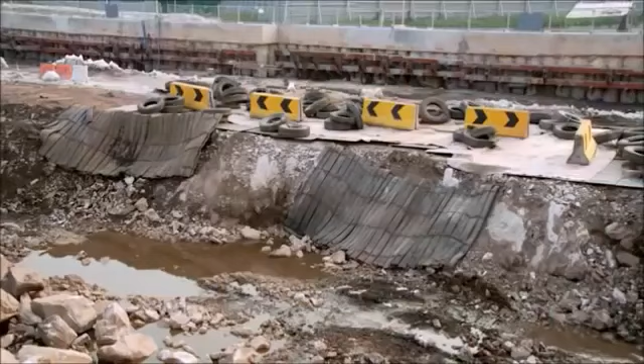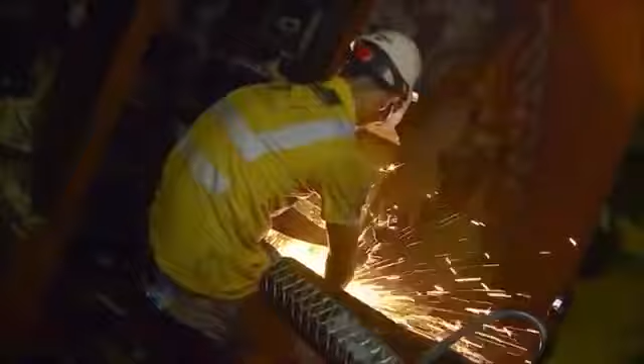Now there's an ambitious solution: a new transit system that will crisscross not only the city, but the entire region of Greater Kuala Lumpur. Huge machines will bore into Kuala Lumpur's treacherous bedrock to carve out almost 20 kilometers of tunnel. Every day of construction, the engineers confront the perils of mechanical failure, fire, and collapse. Get it wrong and billions of dollars of investment could go to waste, and the streets of Kuala Lumpur and its pent-up economy will stay trapped in gridlock.

Kuala Lumpur is one of Asia's most vibrant cities. It's looking to compete with the region's Asian tiger economies. Its magnificent skyline testifies to its soaring ambition. But at street level, it's a different story. The city is blighted by severe congestion that threatens its future growth.

Over 7 million people live and work in the Kuala Lumpur region, the Klang Valley. Every day, they head into town in 4 million cars. As an alternative, a light rail transit system was built. But over time, it has been overwhelmed, and connections are inadequate.

Now there's a solution: a new mass rapid transit system that will reduce the pressure on traffic and unite far-flung parts of the city. For any modern metropolis to be vibrant, to be competitive, to be on par with some of the leading cities in the world, you've got to have a modern public transport system.

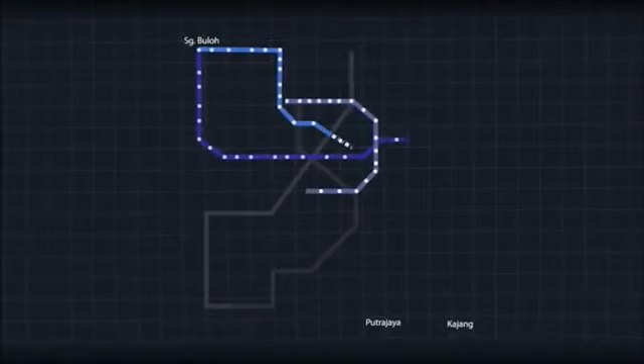The Klang Valley Mass Rapid Transit System, the KVMRT, is Kuala Lumpur's bid for greatness. 3 different routes comprising more than 150 kilometers of brand new lines. It will be seamless travel around the Klang Valley, especially the areas of high concentration population.

And the first stage of the plan is the biggest test of all. This is the Sungai Buloh Kajang line. It will stretch 51 kilometers with 31 new stations. And a fifth of the new line will have to be constructed underground. To do this, 10 giant tunnel boring machines, or TBMs, will be brought to Kuala Lumpur and set to work.

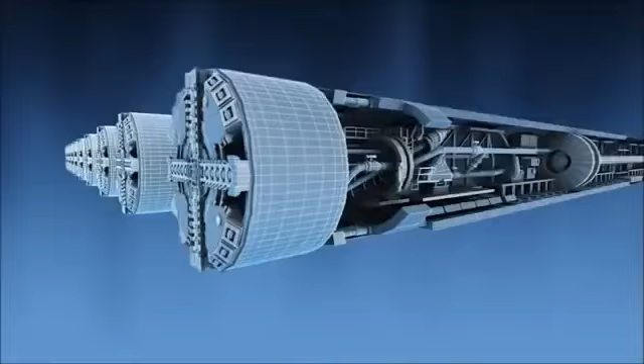These mighty engines do much more than burrow through rock, astonishing though that process is. As the huge drill crunches forward, the back end constructs the tough tunnel frame with high-strength concrete. In charge of this massive operation is engineering veteran Satpal Bogal.

Most cities now, for railway mass transit systems, the tunnels are built using TBMs because of safety issues and because of ground conditions. The underground section of the new MRT will be a perilous undertaking.

For beneath Kuala Lumpur is a formidable engineering challenge. Below the city are 2 very different kinds of rock, and the TBMs will have to deal with both. The western area is known as Kenny Hill, and the eastern areas as the Kuala Lumpur limestone. Imagine the difference between a Dutch Edam and a Swiss cheese riddled with holes.

Dr. Ooi Lean Hock is the project geologist and expert on Kuala Lumpur's underground world. I got this Dutch Edam cheese here. As you can see, this whole piece of cheese is fairly homogeneous, very tight. And Kenny Hill, when it's weathered, it looks something like this. This is like the KL limestone. All right, this is Swiss cheese. As you can see, there are a lot of cavities and voids inside the cheese. These voids can be transmitted all the way to the other side of the cheese. Things can move in from one hole to another hole, and it may come in vertically and go out laterally.

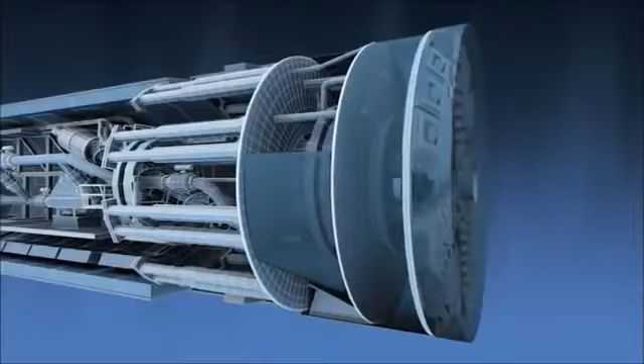This ingenious system was used by the engineers who built the Smart Tunnel in Kuala Lumpur, the world's first combined storm and traffic tunnel. But builders learned some hard lessons about slurry.

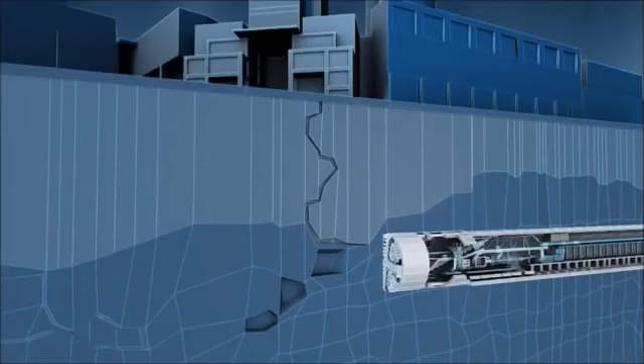Ng Hawei was a rookie engineer on this project. We have the best machines in the world in the Smart project, but we still do have some problems. We just couldn't control the slurry and it easily escapes to the surface, creating sinkholes. What Ng and the engineering team found, to their cost, was that the slurry they injected into the limestone cavities could escape into surrounding rocks and cause havoc, bursting from the ground like a geyser or creating sinkholes at the surface that might suck in people, cars, or buildings.

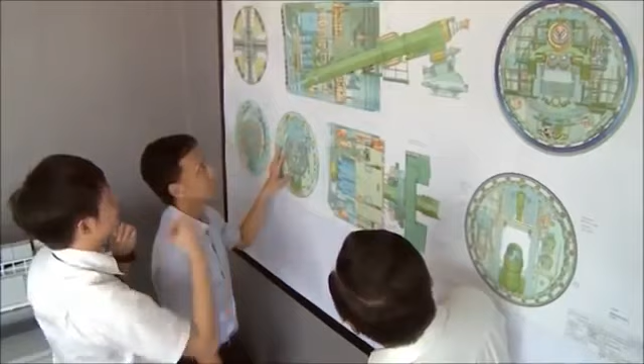Today, Ng heads the tunnel team building Kuala Lumpur's MRT system. And this time, he had to find a solution to the uncontrollable slurry problem. Working with German company Herrenknecht, Ng and the team of engineers have come up with a revolutionary kind of machine. We throw in all the ideas, we have brainstorming sessions, we consult a lot of experts, we have to do a lot of research because no machine has been designed like this before.

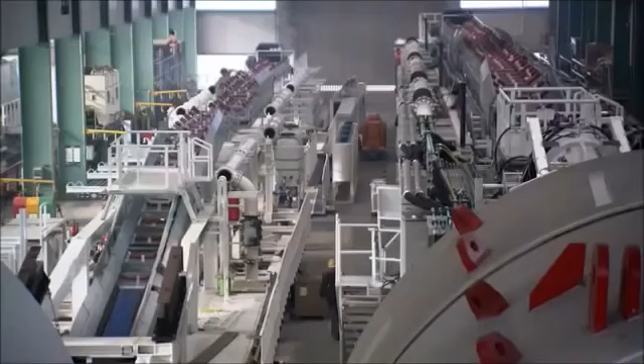From these brainstorming sessions was born this mighty machine. Called the Variable Density Machine, it's the state-of-the-art tunneler. For the first time, a TBM can control the consistency of the slurry and take on whatever Kuala Lumpur's underground throws at it. Even the construction of this revolutionary machine is on an epic scale.

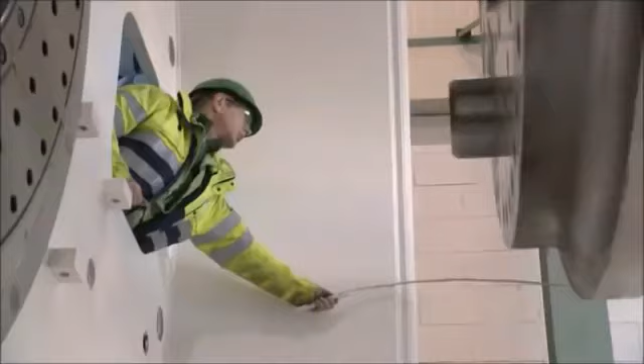Components are brought from all over Europe to be assembled inside the massive factory in Schwanau in Germany and other Herrenknecht plants in China. One machine like this is fitted together with about 40,000 pieces, one by one.

The design starts screw by screw, piece by piece, and this is brought together with all our 400 engineers. They do all these works to come to this level, what you can see today. It takes 9 months to manufacture the revolutionary TBM.

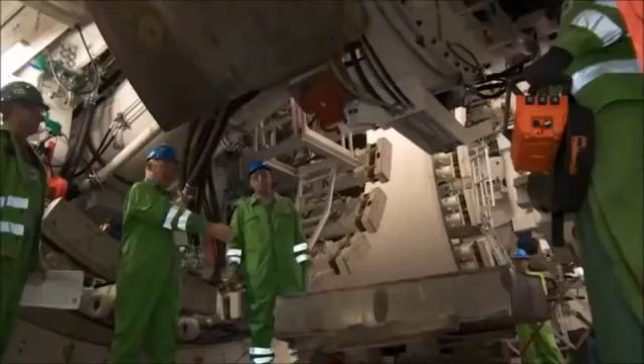Today, it's ready to be put through its paces. We have only seen it on the drawing board so far, so this is the first time that it is all put together. Everything is running, so we can check every equipment, including the cutter heads, the hydraulics, the safety features. This is the last chance for us to make final modifications before we send it to the site and put it in the ground.

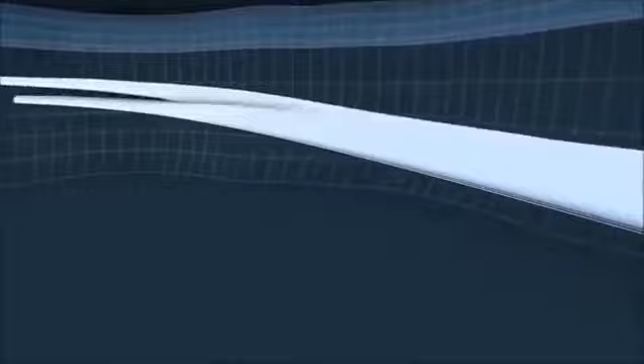As the engineers work on the TBMs in Germany, work gets underway in Kuala Lumpur. The engineering company in charge of tunneling, MMC Gamuda KVMRT, must complete the job in 24 months and with minimum disruption to the city above. The operation is conceived on a military scale and with military precision.

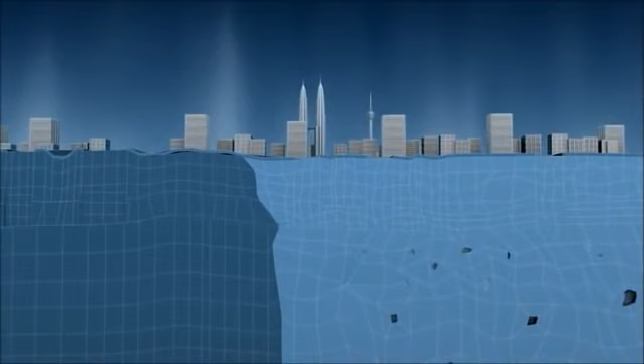The TBMs will be launched from 4 different staging zones along the planned route of the underground section of the MRT. At the western end of the tunnel, the elevated section of the MRT begins its descent underground from the surface. But at the 3 other zones, shafts must be excavated so that the different TBMs can be put to work beneath the city. Eventually, the different sections of the 9.5-kilometer tunnel must all link together.

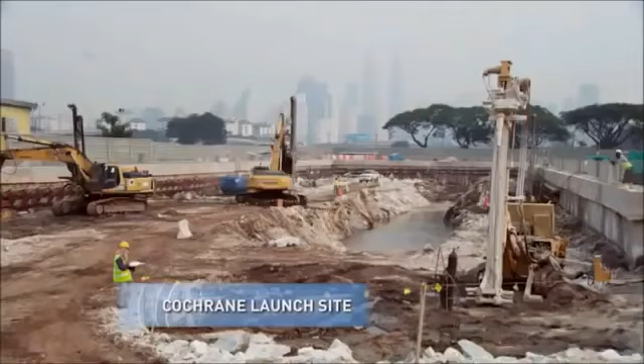Since July 2011, work on Kuala Lumpur's new MRT starts here at the Cochrane site. It must be dug out to a depth of 30 meters before 4 TBMs can be deployed. The huge staging zones will be blasted out of the ground.

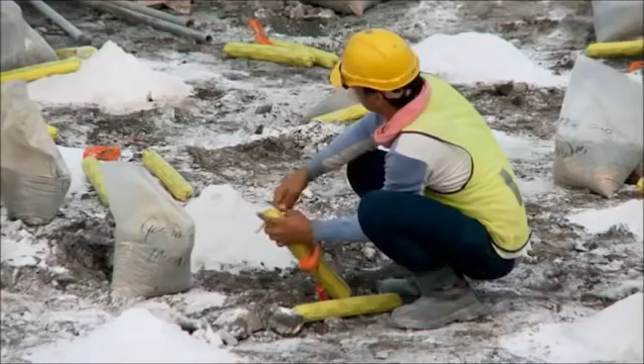We have short time to meet our requirements, so we are working with frequent blasts, more than 2 or 3 blasts a day. The blasting must be carried out with rigorous precision, especially in a city as dense as Kuala Lumpur. So when you talk about blasting itself, it's dangerous.

You can see we've been surrounded by high-rise buildings. Now at the moment, you're using about 150 to 200 kg, so that can bring a 10-story building down. The solution is to sequence each blast, creating a pressure wave that, in theory, won't damage surrounding buildings.

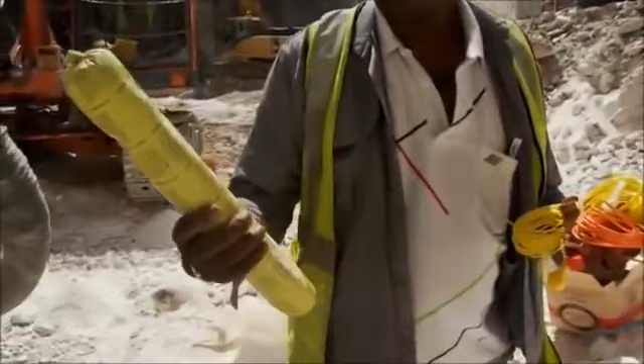These are the basic things we use. My hand now is explosive, which will be charged to the detonators over here, and it will be connected one at a time, and finally we have delays. This will segregate the blasting rather than at one go.

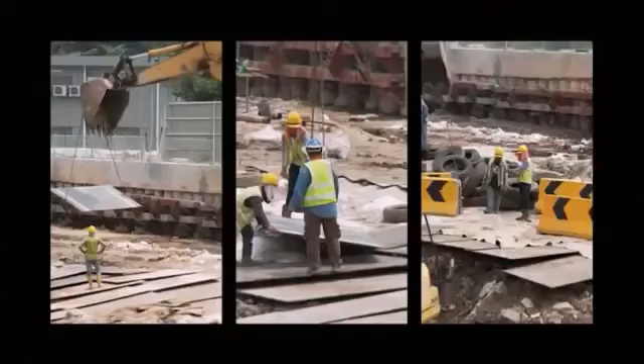Engineers dig rows of holes between 3 to 6 meters deep. Then the explosive charge is inserted inside with a detonator. These are connected to a central command point. But nothing is left to chance. Giant barriers of steel plates, truck tires, and concrete prevent debris flying from the site. The charges are set.

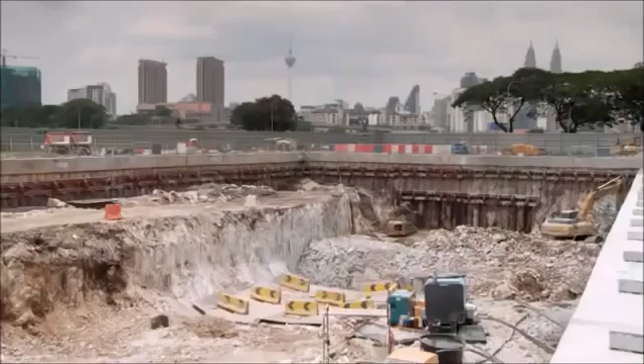The engineers have got the right formula, and the surrounding buildings are safe. The blasting continues at the Cochrane site for seven explosive months. Enough rock and soil to fill 50 Olympic-sized swimming pools is blown out of the ground.

Finally, the site is ready to receive the first TBM, code name 774. At the beginning of 2013, the first new model arrives in Kuala Lumpur. The giant machine is transported in parts to the Cochrane site on huge lorries.

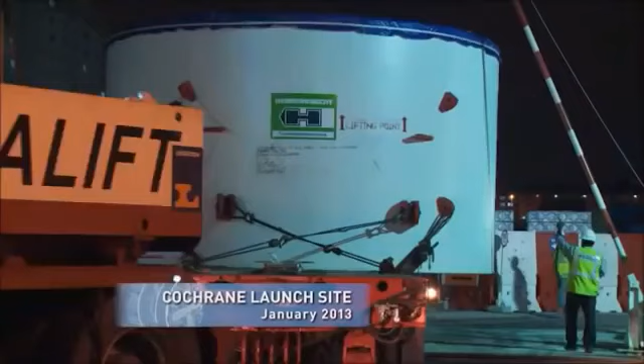But that's the simple part. Now the 160-ton monster must be lowered into the excavated shaft so that they can start chewing into bedrock. To lift it down 30 meters down the shaft, we have to be very careful. Anything can go wrong, and then we are stuck. It will push back the whole project completion by a lot.

At the site, everyone is holding their breath as the TBM begins its descent underground.

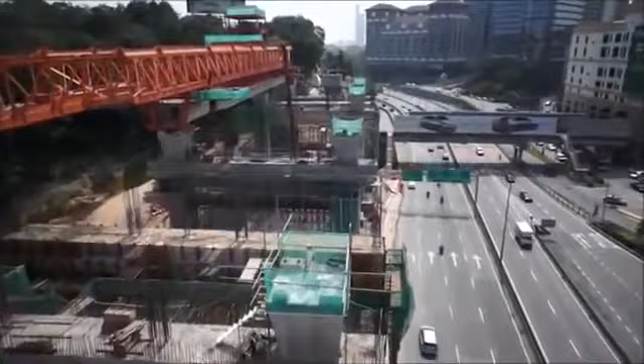Malaysia's capital, Kuala Lumpur, is being transformed into a huge building site. A new MRT system is under construction. Close to 10 kilometers will be built beneath the city, and a revolutionary new tunnel boring machine, or TBM, is brought from Germany. The first to be sent into action weighs 160 tons and has to be delicately lowered 30 meters to the tunnel entrance.

The man in charge of the tunnel operation is Ng Hao Wei. He won his spurs building Kuala Lumpur's famous smart tunnel.

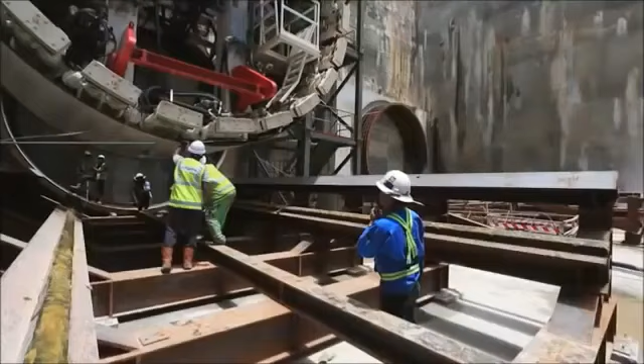We are dealing with very delicate components. We cannot afford to damage it. If the extent of damage is huge, then the impact to the project will be tremendous.

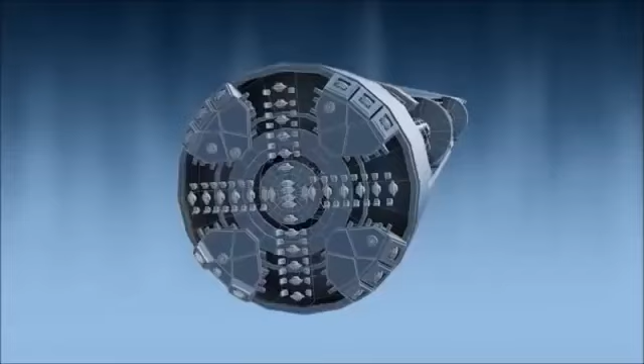This is literally the cutting edge, the business end of the huge machine. The circular cutter head weighs 70 tons with 37 tungsten carbide cutting discs, which are stiffer than steel and denser than titanium. The entire TBM is 135 meters long, almost double the length of a 747 jet airliner.

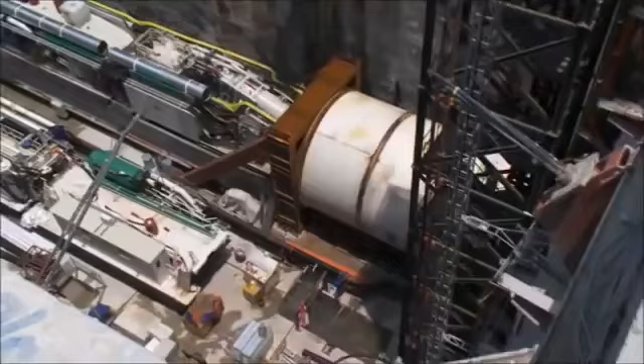Each TBM has 10 interconnected gantries to support the operation. Only three-quarters of the shaft has so far been excavated, so the monster machine has to be assembled in sections. We assemble up to the sixth gantry, which will give us the key components of hydraulics and electrics, so we can start to launch the machine, at the same time give sufficient space for the shaft excavation to go on. It takes just under three months for the TBM to be assembled.

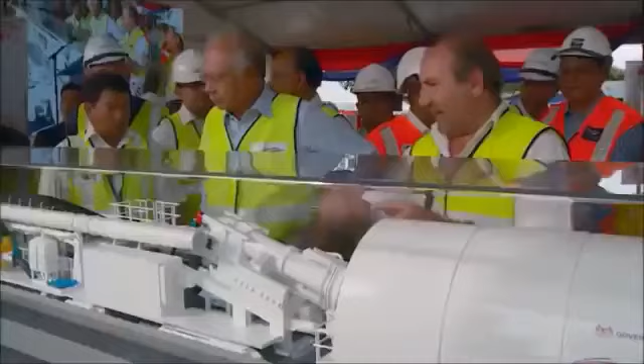The Prime Minister of Malaysia launches the very first variable density TBM. It's actually a technological marvel. And it goes to show that, in partnership with a German company, Malaysians can offer a lot of our technical guidance and advice. This is something that we can be really proud of.

One day later, Ng Hao Wei and his mentor Gustav Klados arrived to check on the machine's progress. Gus, a veteran Hungarian tunneler, has worked on some of the biggest tunneling projects in the world, including the Channel Tunnel linking Britain and France, and the Smart Tunnel here in Kuala Lumpur. This tunnel warrior is the team's project manager and is thrilled to be working back in the city on the new machine.

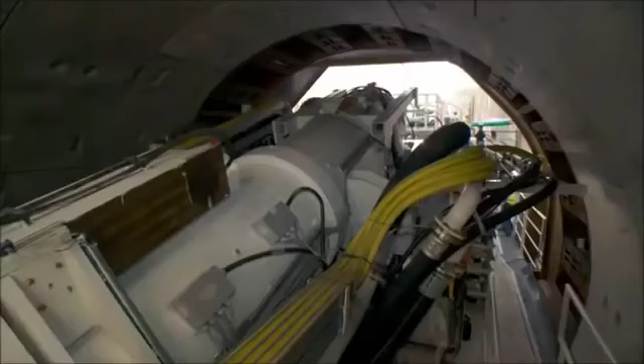It's uncharted territory. We are trying out something totally new. A lot of people at the beginning said no, it won't work. But now it is excavating. You can hear the stones moving around in the pipe, so it's a fantastic noise. It's my favorite, much better than in the office.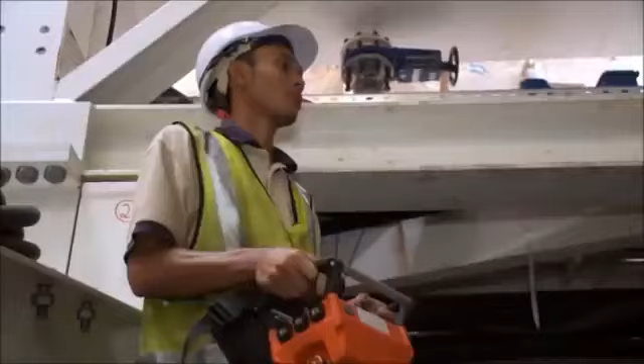It's not just the machines that will need breaking in. The giant TBMs must be served by an army of workers, day and night, week after week, month after month.

I'm new here, but I try to make my best every day. Everybody starts as new. Trust me, me too, I did start as a new guy. My first job was to go and count the number of nails and bolts and nuts in the stores. I went there and literally counted them for a week. When I finished, I went to the storekeeper and he told me that we usually use a scale.

The MRT tunneling project will need thousands of workers over the two-year period of construction, and MMC Gamuda set up an academy to train the hundreds of workers needed to finish the tunnel on time.

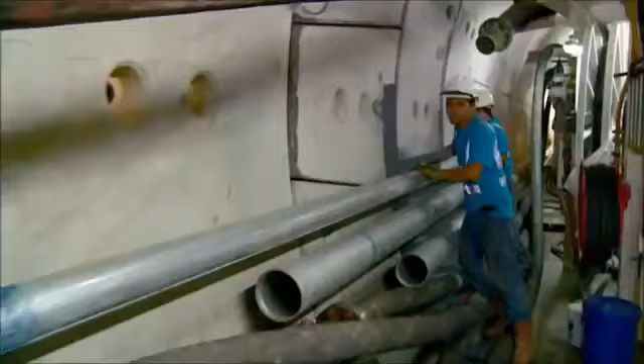Veteran or newcomer, the team faces a daily avalanche of problems, and right now the problem is pretty basic. The TBM is just not picking up speed. 8 millimeters a minute, not very fast, but it's all right.

At this pace of tunneling, the project will take 4 years longer than expected and run millions of dollars over budget.

But veteran engineer Gus Klados hopes that the giant machine will soon pick up speed. In the next few months, it is just a matter of breaking in the machine, like a horse which has never been ridden before. And I am convinced that we will make it work.

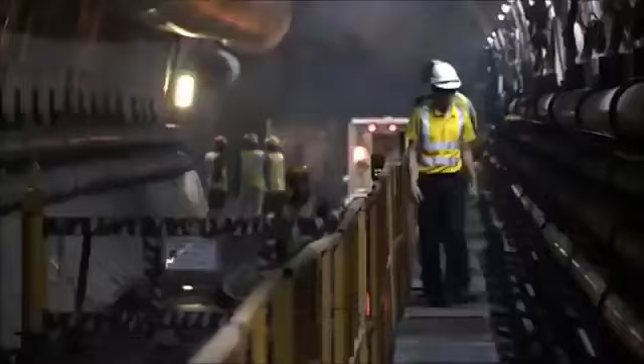The team is under pressure to complete the tunneling works on time. In the tunnels, the TBMs never stop mining. It's a 24-hour operation. And three weeks since mining began, the giant machine has at last picked up speed.

The TBM is like a huge underground factory, drilling, building, and spewing out waste. The heart of the entire operation is in this tiny space.

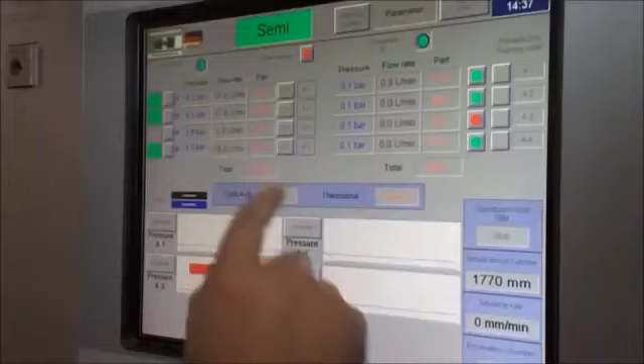So what's happening? Pressure sensor number 4 has a broken wire. Control cabin means the heart, the control center of the TBM where everything is controlled. We need to push one.

If you're building a skyscraper, visibility is not normally a problem. But underground, it's a different story. You can't see through rock. So to give the TBM underground eyes, the machine is equipped with arrays of sophisticated sensors. It's like when you are working in a submarine. You have to depend on the sensors, you have to depend on communications, you have to depend on eyes other than yourself. You can't see anything.

Inside the control cabin, engineers can work out with absolute precision the real-time position of the TBM, calculate changes of direction, and when to start lining the tunnel wall.

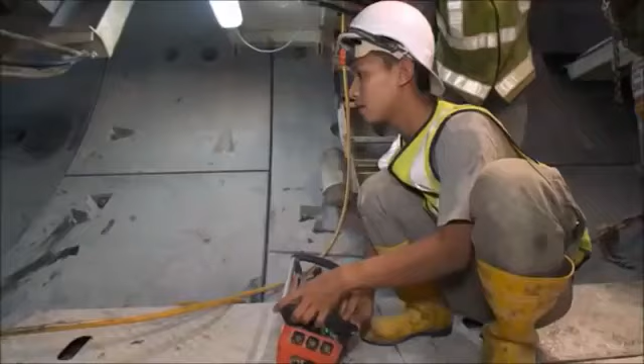After mining about 1.4 meters, we build the segments piece by piece and then build them up like a jigsaw puzzle. These tunnel rings are made from 7 segments plus 1 keystone that holds everything together.

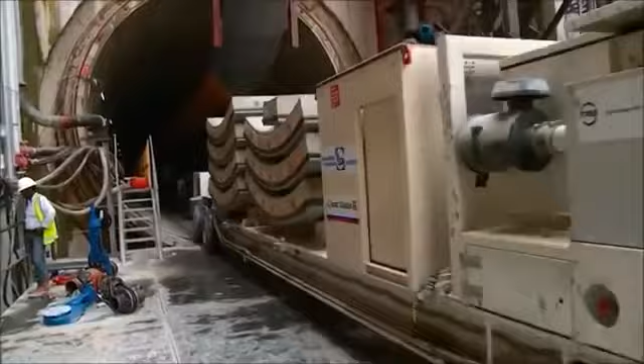The concrete wall segments can withstand extreme pressure 30 meters underground. All day long, concrete segments arrive at the TBM. Each segment weighs 2.2 metric tons.

Giant hydraulic arms swing the segments into place using the TBM's vacuum erector, which uses the power of suction to raise and position each segment.

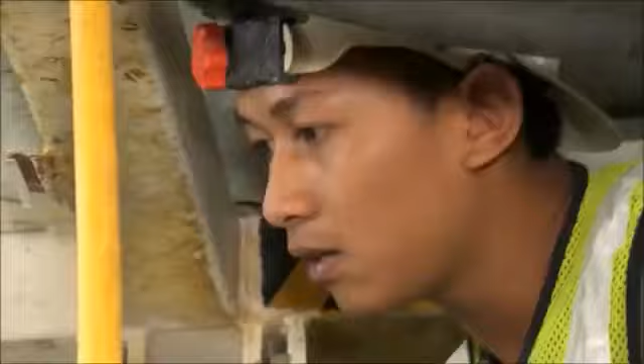Precision is essential. If any one of these segments is wrongly positioned, the consequences would be catastrophic. So it's very important to drum into the ring building team that they have to build it to the required tolerance of a few millimeters precision.

If we are out of tolerance, the water will find its way to seep through and we'll have a great problem to seal it up. Over time, as graduates of the Tunnel Training Academy get more experience, the process builds up momentum.

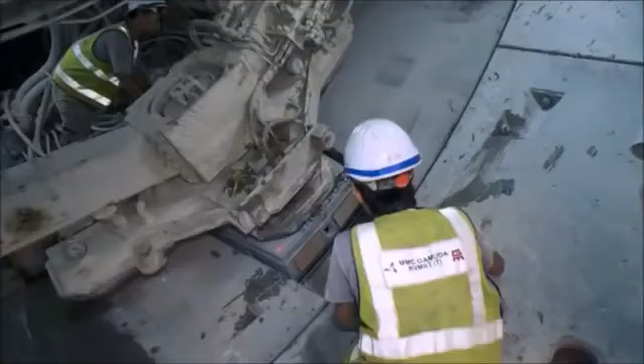In the first week, the teams managed to place just 3 rings a day. Three months in, and the rate is 5 times higher. The campaign to excavate Kuala Lumpur's new MRT tunnels is about to enter a more intense phase. By November 2013, 4 TBMs have been successfully launched from the Cochrane site.

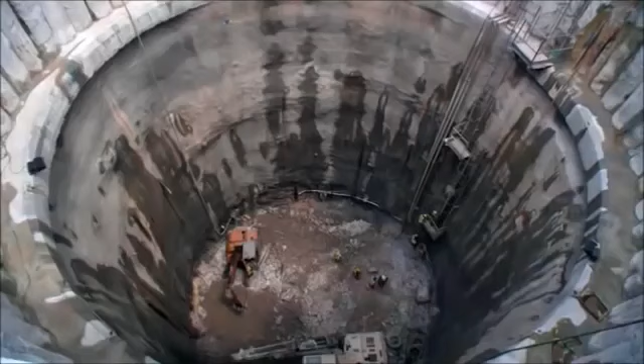But at another launch site near Inai Road, the engineers have run into difficulties. Here, 2 circular shafts are being excavated to 30 and 45 meters in depth. But as the shafts are blasted out of the ground, disaster strikes.

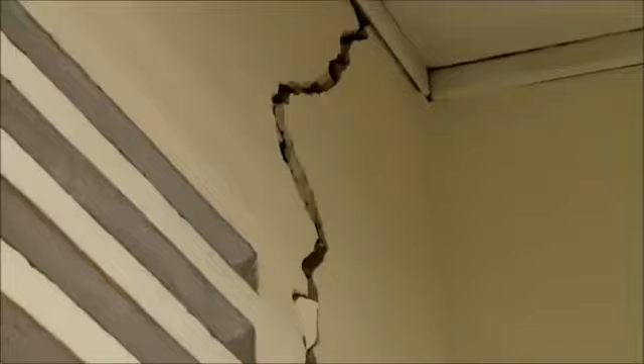Terrified, Mr. Jamal calls the company in charge of the MRT project. When inspectors see the condition of his home, they make an immediate decision to move the family out. Engineers now need to explain what has gone wrong and whether other homes are at risk.

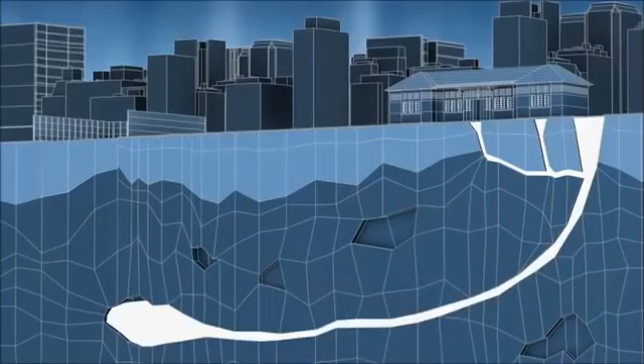In limestone, what happened is that the solution features can be connected laterally and vertically. What happened is we drill a shaft, so this hits a connection. When there's a hole, it's like a pipe culvert.

If you have a culvert connecting from the shaft to underneath Mr. Jamal's house, that forms a very easy flow passage of water, bringing the soil from underneath Jamal's house into the shaft. And that results in sinkholes.

And it's not only Mr. Jamal's house that's in danger. Water is pouring in from the walls in the deeper of the 2 Inai shafts.

It's unstoppable, and the situation is a tough call for project director Satpal Bogal. We couldn't stem it, and the decision was taken to backfill it for safety. That decision then followed on to other changes to the program.

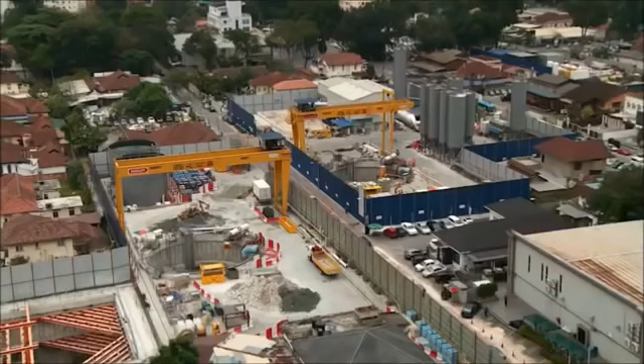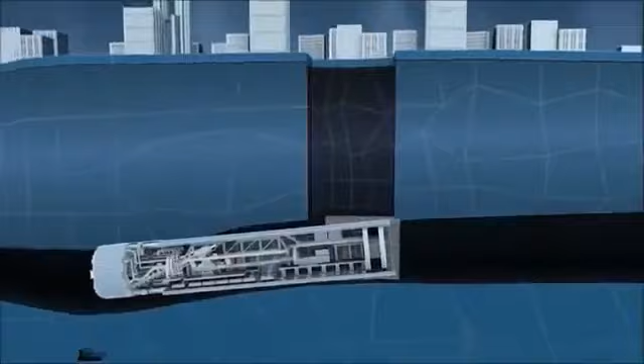Abandoning one of the two Inai shafts is a huge setback. Now only one TBM can be launched from here, meaning a new strategy has to be devised. The first TBM brought to Malaysia, 774, which has been mining from the Cochrane site, must now make up the difference and tunnel more than twice the distance. It will put the complex machine under severe strain.

It's not only flooding that makes the Inai launch site such a headache for the engineers, it's also a very tight fit compared to the other launch sites.

Tunnel engineer Aslan Marzuki is in charge of getting the huge TBM to the bottom of the shaft. It's a smaller shaft, it's not a square, it's a circle. That saves space, but that means our launching is going to be staggered.

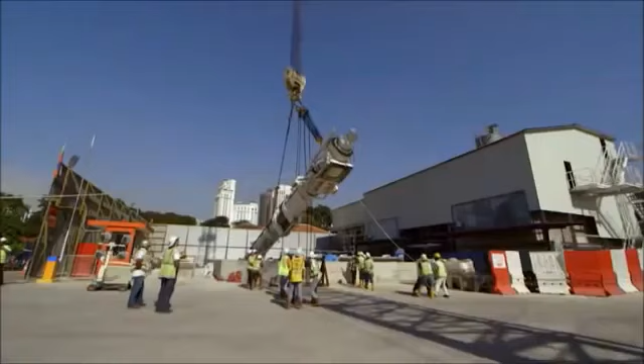The team will blast out tunnels on both sides of the shaft. Then the front section of the TBM is inserted. Next, 3 out of the 10 gantries will be lowered one by one, followed by the giant screw. The problem is that the 18-meter screw segment is longer than the width of the shaft.

Behind me, this is our biggest component that's going to be lowered down. It's the most difficult one because this length is actually bigger than the shaft itself.

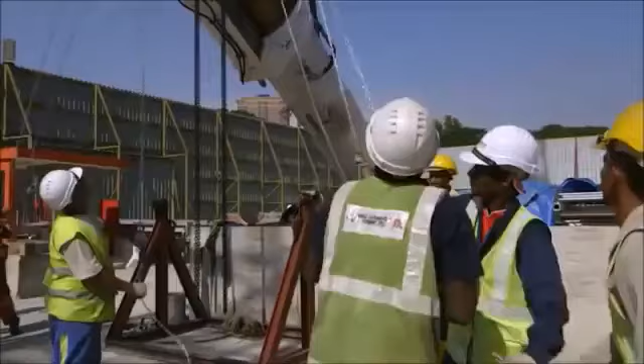The solution is simple, but risky. The screw segment of the TBM will have to be lowered into the shaft at an angle. We have to tilt the screw conveyor at a 36 degree angle, using a chain block and a hand winch to pull the machine upwards. It sounds simple, but that giant screw weighs a whopping 15 tons, and any deviation from that critical 36 degrees would be catastrophic.

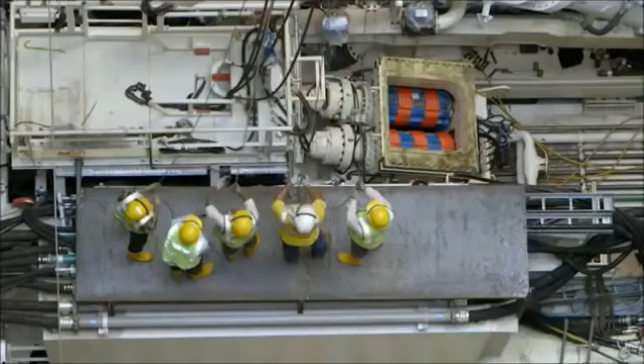At the bottom of the shaft, the engineers face another challenge. The angle of descent has to be lowered. It's another fiddly maneuver with a lot of complicated machinery at stake. When you lower it down, the final angle is 15 degrees. Down there, you still have to do the same exercise again, but it has to be a slow process. After 2 hours, the screw conveyor is finally in place.

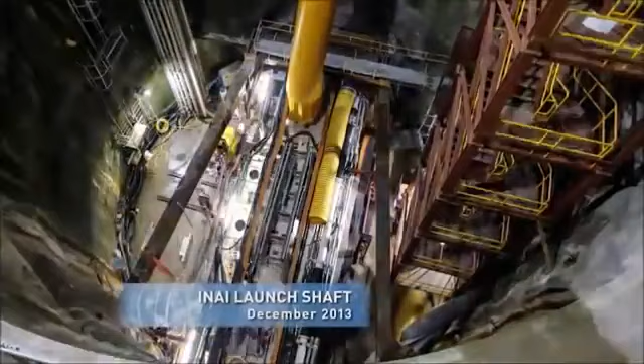It takes 3 months of hard slog to put the TBM together, but at last it can begin burrowing into the limestone. This underworld is packed with hidden dangers. Like Swiss cheese, the rock is riddled with cavities that could wreck the multi-million-dollar boring machine.

When you're tunneling this way and you have a cave directly underneath your cutter, and it's big enough that you cannot develop a face support, the thing just dips inside. In that situation, we are snookered. It will take us months to recover or to bring that TBM cutter face into operation again.

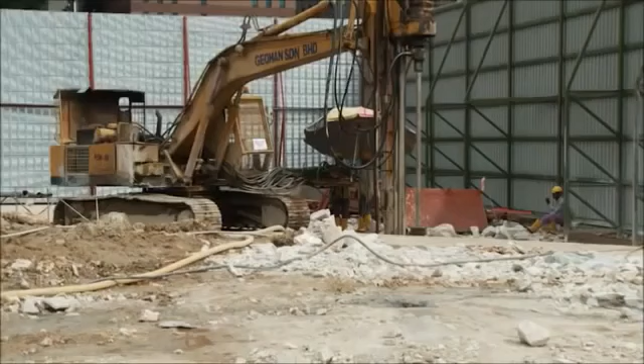So as the huge drill edges forward at 14 meters a day, an army of engineers is busy scouting the perils that lie ahead. They drill hundreds of boreholes into the layers of rock. Once a cavity is detected, concrete is poured into the hole to shore it up. It's a process called grouting.

If we do encounter such a thing, then we'll do a lot of compaction grouting to fill up this void, like you go to a dentist to fill up your cavity, to ensure that when we are tunneling through, the TBM can go through safely.

But some cavities can be less than a meter wide. These are much harder to fill, but still pose a threat. There's no way we can pick it up. We are unable to treat all these features along our tunnel alignment. So what we then need is a machine that can cater for all these little challenges.

Enter the new breed of tunnel boring machines. Behind the drill, a sealed high-pressure chamber is pumped full of liquid called bentonite slurry. Unlike previous models, the new TBMs can control the density of this thick gray liquid, changing the consistency from a thin, watery liquid to a thicker, honey-like substance. The thicker slurry is used to fill these hidden cavities, and its density prevents it escaping through the porous rock to the surface.

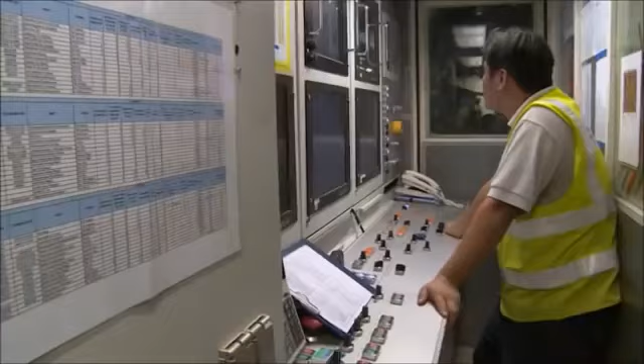The machine is able to operate at different modes at the flip of a button or some switches. So when there are situations where we have major loss of slurry, we can then switch to a thicker density - a little paste that chokes it up - and then we can mine through very easily. The revolutionary new tunneling system soon proves to be a success.

But there is a problem that all tunnel engineers fear at the back of their minds: fire. Every tunneler's nightmare. For engineers excavating Kuala Lumpur's new MRT system, the most terrifying scenario is a fire in the tunnel. A blaze can suck oxygen from the air in seconds. Workers can suffocate with terrifying speed, and the tunnel itself works like an oven, insulating the environment and ramping up temperatures to deadly levels.

Tunnel workers must be ready to react at any moment, and training exercises are made as real as possible. Christopher Fenton, head of safety, health, and environment for the underground, is training the company's emergency rescue team. Tunnels are very dangerous during construction. Fire is the last thing we want, and we need to be able to respond to it very quickly if it did happen.

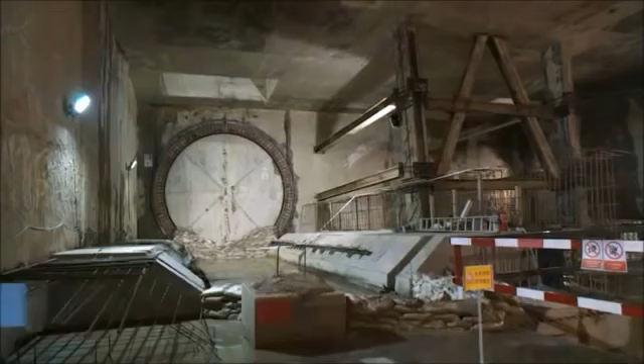Christmas Eve 2013, and the MRT engineers have cause to celebrate. One section of the tunnel, where the MRT line dives underground at Semantan to the Museum Negara station, has been completed. It's the project's first breakthrough, and at any moment the TBM drill head will emerge from this tunnel.

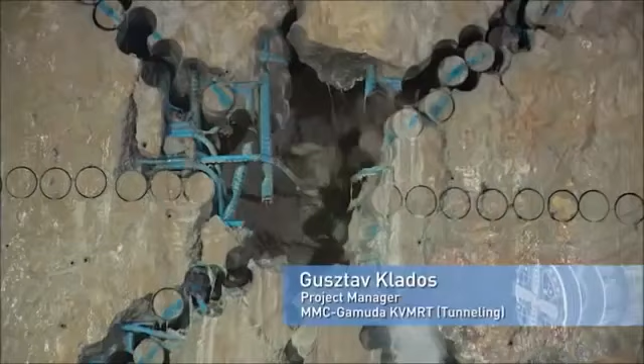It's an anxious wait for tunnel manager Chin Raymond. I told him if it doesn't come in the middle, it has to jump off a cliff somewhere. After drilling for 6 months, the TBM punches through right on target.

Okay, thank you. Congratulations. Well done, man. Okay. Good. Yes, great. Finally, I pushed my machine, it came in. I've been working for more than 24 hours. I can have a good rest to enjoy my Christmas.

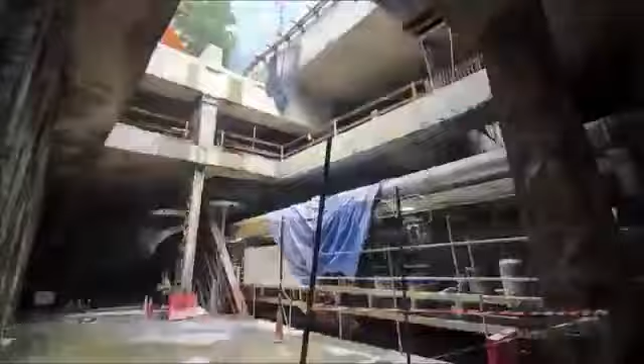But the machines don't get a holiday. As soon as the TBM completes its breakthrough, it is hauled into position to begin work on the tunnel that will link Museum Negara to the next station. The TBM is now burrowing beneath the historical heart of Kuala Lumpur.

The Museum Negara is a repository of the nation's history and culture. Its facade is lined with precious mosaics. Further along the path of the excavation is the old railway station, an icon of the past that stood the test of time. But can it withstand the mighty TBM as they thread their way nearby? We were stuck with having to cross under some sensitive structures, and the ground settlement would affect the existing structures. If there's too much ground settlement, the buildings could collapse.

For the old building, we had to pay much more extra care because we don't know how good the structure is, or how good this building's foundation is. So we had to take extra precaution on that.

A team of surveyors now equip these venerable buildings with highly sensitive sensors that monitor every vibration. As the TBM approaches, Tae Chi Yong and his team nervously carry out hourly tests to monitor the old buildings. The TBM is directly below this building. We get to monitor the effects and impact of our TBM drive on the structures above, on the surface above.

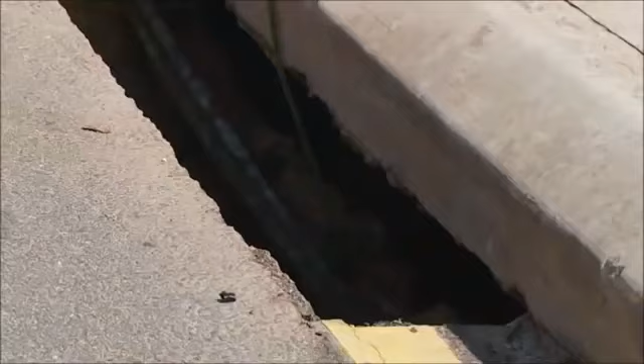Right above the stalled TBM, ominous signs ripple across the road, less than a kilometer from the presidential residence. While the people of Kuala Lumpur get used to living and working in a massive work site, where giant boring machines gnaw away at the city's bedrock to build a new MRT, the President of the United States will be descending on Malaysia in 3 days' time.

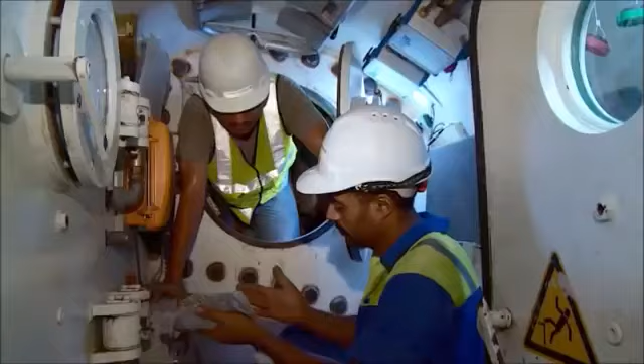But all is not well with TBM 774. Located less than 400 meters from Obama's planned accommodation, the TBM gets a bad case of indigestion and is unable to process the waste from the cutter head. It has come to a halt.

Directly above the TBM, a team is tasked with monitoring road surfaces to look for any signs of trouble. Called the Bull Gang, it is led by Michael Poon. We have a team of people patrolling 24 hours. We have to check on the surface.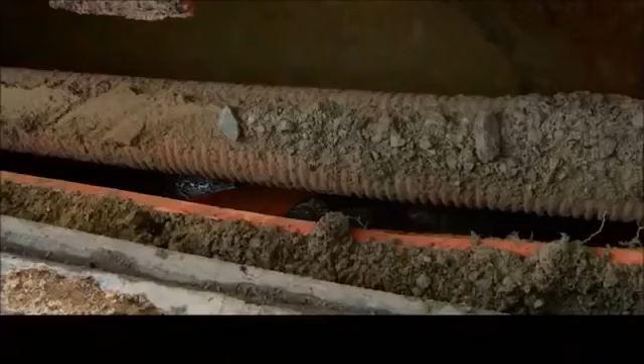This morning I walked by, I saw some settlement. It's just a small depression. I can see the hole, it's quite deep. At the surface, the cracks don't seem to pose much of a threat.

But like icebergs, most of the danger is hidden. Down there is a void big enough to fit an electric car. We have an unscheduled stop. They have to lower all the slurry. That means the face support is affected, and that causes a depression or a sinkhole in front of the cutter face.

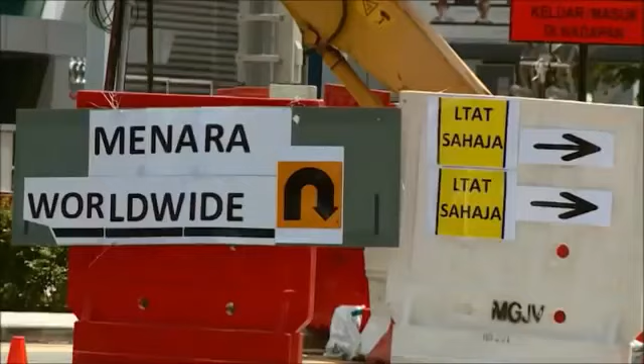An emergency response team reacts immediately. The road is closed to traffic. Then we decide to order mortar to fill up the hole. The hole is quickly filled with 5 cement trucks of concrete, and frantic repair works continue inside TBM 774.

Across town, there is reason to celebrate. The 5th breakthrough of the project will take place today. It's a landmark moment - it means that 50% of the tunnel has been completed.

Well, every breakthrough is like a landing on a plane, right? Once you're there, you feel great because you brought home the TBM. The breakthrough, I thought it was very exciting. Now we finished everything, it's very, very good. I'm very content with the progress as well.

The quality of the tunnel linings in the precast concrete inside is one of the best. We work as a team. We work night and day, blood and sweat, hard time, good time. This is the prize for all the crew. This is like a present.

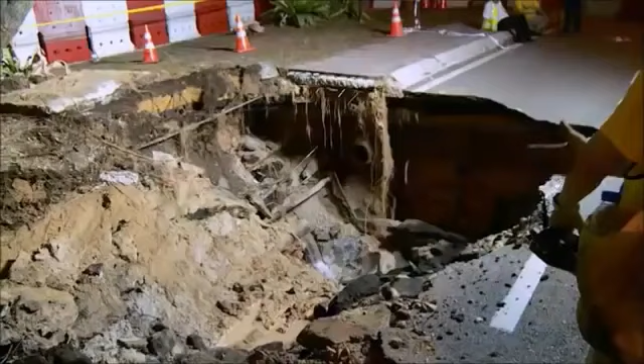But the celebrations are short-lived. As TBM 774 finally starts mining again, President Obama arrives in Kuala Lumpur. But to the horror of the team, another collapse occurs just meters away from the earlier sinkhole as the president is at the official state dinner.

This new sinkhole is an even bigger problem than the previous one. Ground movement has broken water pipes, and the hole is filled with live power cables.

President Obama is living nearby. We definitely would not want to cut off water and power to where Mr. Obama is living, obviously. So we're trying to get this done in the quickest time possible.

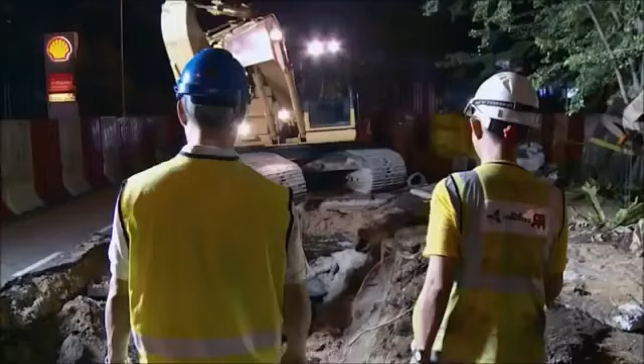Racing against time, the Bull Gang takes 5 hours to repair water pipes and fill the hole. As they work into the night, President Obama and his entourage are blissfully unaware of the battle being fought less than 400 meters from their hotel.

TBM 774 is now approaching the zone where the underground geology changes from the karstic limestone to the Kenny Hill Formation - from Swiss cheese to Edam.

We are going through a very distinct change in ground conditions. In normal cases, you will need to use 2 different types of machines, and you will need to have another launch shaft to do this. It will take months. But the new variable density TBMs can be retooled underground.

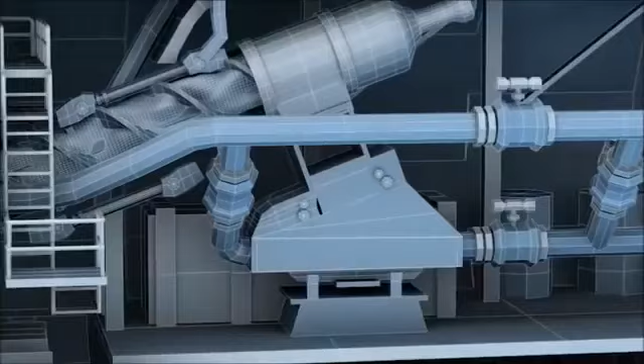It's a matter of changing the way waste is extracted. Instead of extracting through pipes, it needs to be removed with a system of conveyor belts right to the end of the gantries onto these so-called muck cars. The conversion takes 1 week to complete, but it's a much smoother process than the older system.

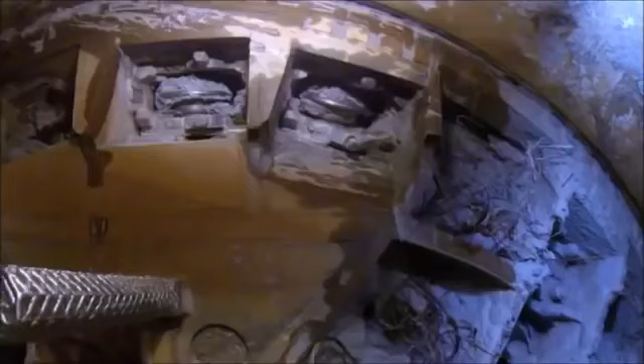But a much bigger hurdle awaits the TBM 774, an underground tangle of steel wires that could bring the TBM to a standstill.

30 meters beneath Kuala Lumpur's nightlife hotspot, Bukit Bintang, engineers excavating the underground section of the city's new MRT encounter an unexpected obstacle. Contractors of a shopping mall adjoining the street have left steel wires known as ground anchors in place, and these are bang in the path of the TBM.

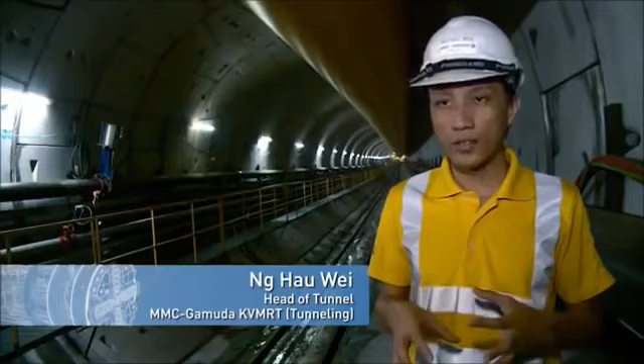Put into the ground as temporary supports for the basements, they could hold up work for months. It's very difficult to find them from the surface, and you cannot remove them from the basement anymore because the permanent walls are built, right?

They are all covered. Since the steel wires cannot be extracted, a decision is made to push on through with the TBM. But there is a continuous risk that the drill head may become entangled and damaged in the wires.

It is the task of engineer Ng Hau Wei to monitor the tunnel ahead. So in the morning, actually, we found some ground anchors dropped underneath the conveyor belt, and we decided to stop the TBM, look for the ground anchors, cut it and remove it.

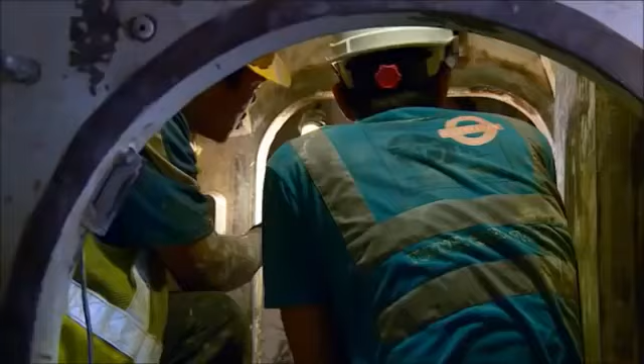A team now has to enter the space around the cutter head at the front of the TBM. There's little space to maneuver, and temperatures are close to 40 degrees Celsius. To overcome this tangle, first, the team washes away earth from the cutter, exposing the snarl of steel wires caught in the cutter head. These must be cut away with an oxyacetylene torch. It's a laborious process.

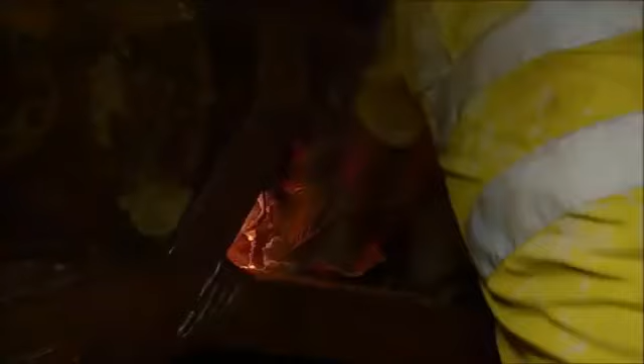Every time they hit the ground anchors, the TBM halts as the wires are trimmed away. It takes 2 weeks to mine through this web, but it could have been worse. If we had hit all the ground anchors that we expected, it would have delayed the project by about 3 to 4 months. And we were able to go down and cut these ropes so that they weren't stopping the cutter head from turning, and we carried on.

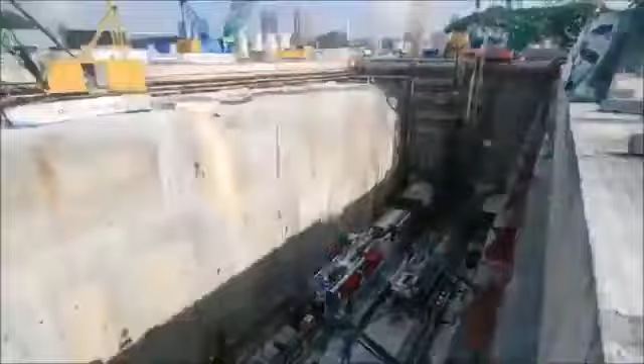It's the final breakthrough. After 23 months of excavation, from tomorrow, the TBM will fall silent. The honor goes to TBM 774. This was the first TBM to be launched into the limestone labyrinth under Kuala Lumpur. It has burrowed its way through almost 5 torturous kilometers of rock and soil. Now it must make the final breakthrough.

It's a thrilling day for the engineers inside the giant machine. We are about to break through. We have about 400 mm left on the cut. Hopefully we'll get a successful breakthrough. What's happening now is we're cutting the D-wall, so that's basically the barrier between us and open air. So this is a very exciting moment for us. Any moment now, maybe within the next half an hour, we'll be out in the station.

This is actually the first TBM that we launched back in 2013. Less than 2 years, just short of 2 years, we have done 20 kilometers of tunneling. This is a great day for me and for the whole team.

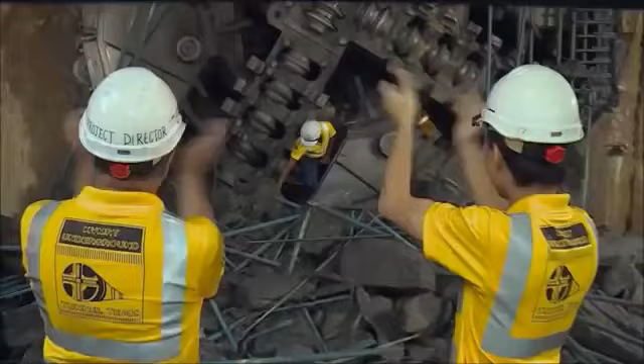This is the completion of our actual tunnel mining, which is probably the highest risk on the project. Smart had over 50 sinkholes in its similar sort of length of drive, and on this project, we've had only about 3. We used a variable density machine effectively, and that has proven to be a success.

Just weeks ago, MMC Gamuda won the Technical Innovation of the Year award for the variable density TBM in the United Kingdom, the biggest development in TBM technology in the last 25-30 years. So we have witnessed something new in this business. These are the most versatile machines existent in the moment. This is the future.

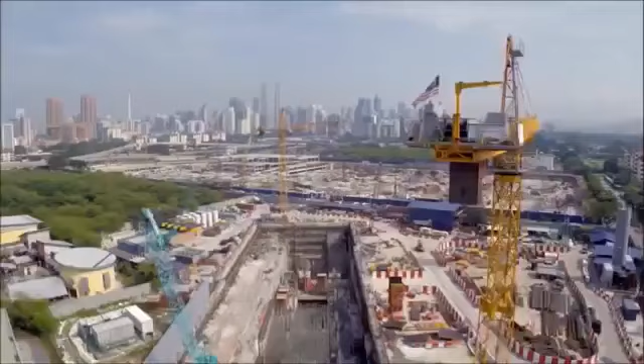The last breakthrough is a landmark moment. Now the race is on to complete the stations and get the MRT running. Only then can Kuala Lumpur's clogged up traffic arteries become truly open for business.

You're basically going to live in a modern metropolis of the 21st century. This is the new world that the people of Greater Kuala Lumpur can look forward to. A city seamlessly integrated by overground and underground MRT lines, linking together the city's heart and its far-flung suburbs, where today's gridlock is a distant memory.